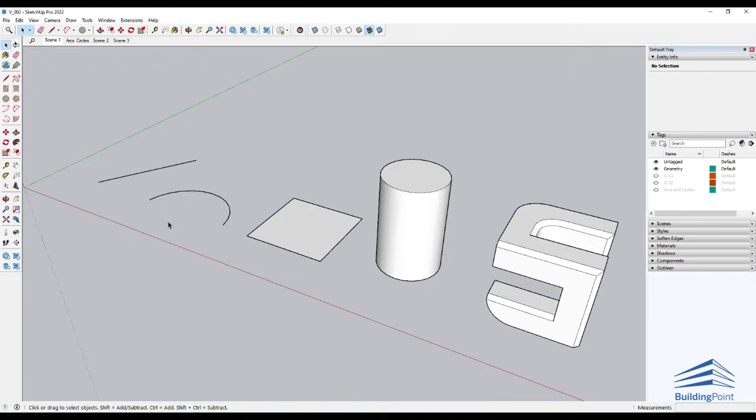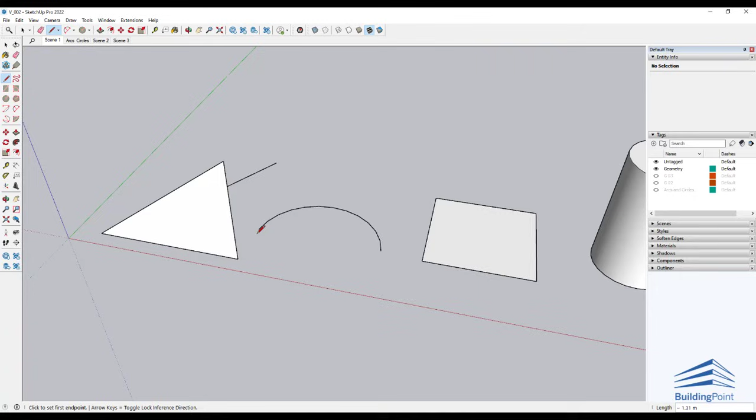As far as SketchUp is concerned, an edge is formed by connecting 2 points in 3D space. So if I want to connect this point to this point or this point in any other direction, I'm creating edges. And they're called edges because eventually, if I have a few edges, I'm going to generate a face. So the term edge is that connection between 2 points in 3D space that will generate a face. And I know some people use the term line, which is fine, but we are going to associate the term line with the command.

Now, let's have a look at the circle command and the arc command. These two commands allow you to draw curves in your models. And it's important to understand that even though they're curved, they're basically a series of interconnected edges, as you can see on the screen. You have the option to change the number of edges before and after you create one of those two elements.

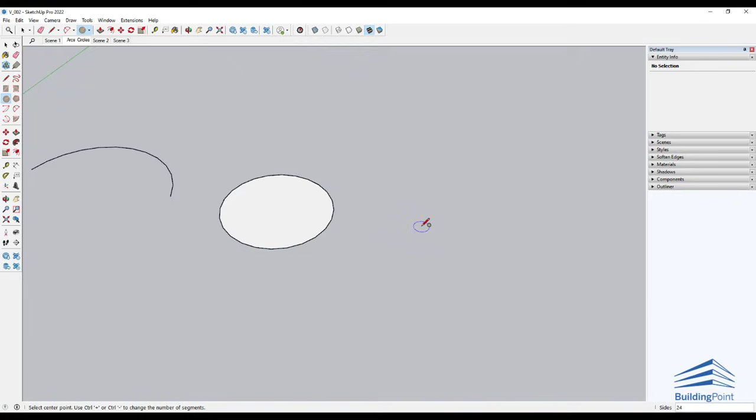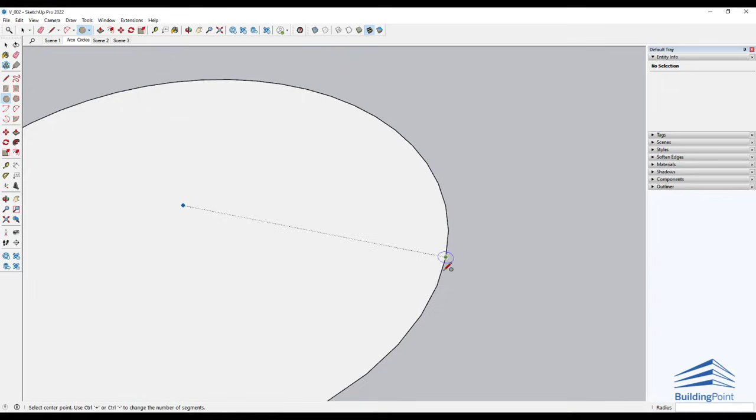For this example, let's just get a circle and notice that down in the measurement box, SketchUp has assigned 24 sides by default for every circle, but you can actually change that before you place the circle. So if you go to the measurement box and type 45, enter, the circle that you create there is going to be formed by 45 interconnected edges. And same with the arc.

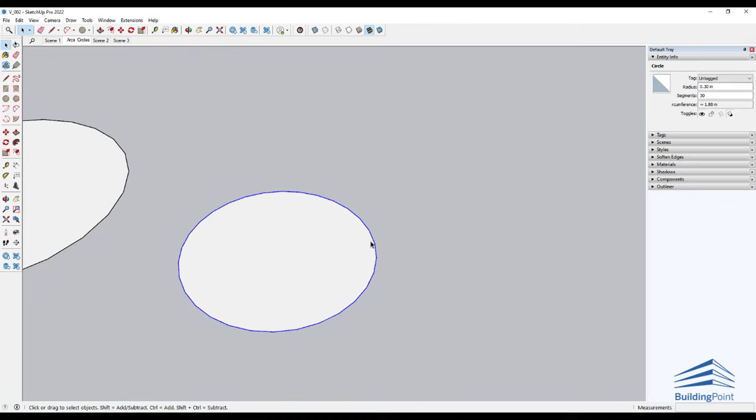Once it's been placed, you have the same option of selecting that circle and modifying the number of segments in the Entity Info window. So you can change the 45 to 30, for instance, enter, and now that circle has 30 straight interconnected edges. So it doesn't change the curve, it doesn't change the place of the element, but you can modify it before or after.

Another thing to know is that you can have a series of edges, like in this case, I've drawn 4 different edges, and by selecting all of them, whether they're straight edges or arcs, you can right click and weld them. What it does is it creates all these 4 edges as one single entity, and SketchUp recognizes that entity as a curve. In fact, in the Entity Info, you can see it's a curve, even though it doesn't look like it, and that curve has 4 segments.

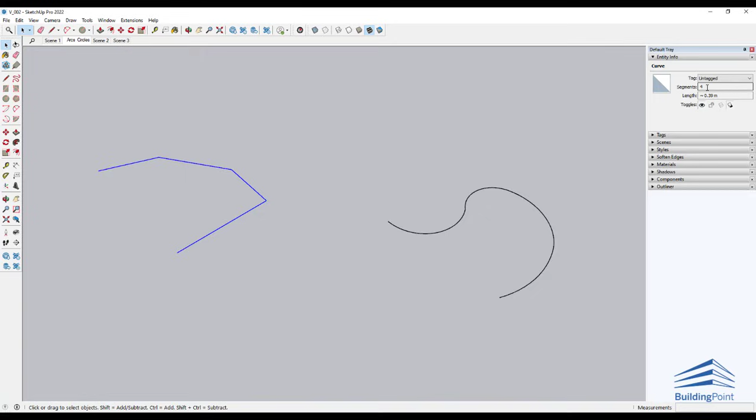Now, very different to arcs and circles, because if I go to the number of segments, I cannot change that number. The important thing to remember is that whether it's an arc, a circle or a curve, these elements are basically made of a series of edges. And those edges can be broken apart or put together again as needed.

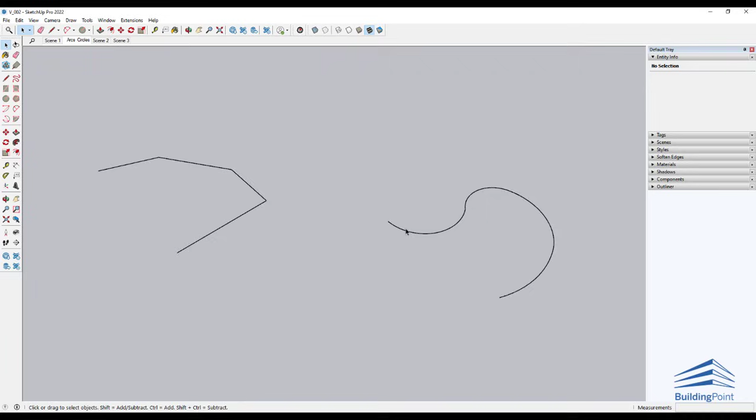Let's have a look now at faces. A face is created when 3 or more edges are connected in a single plane. So in this case, as you can see here, I have these 3 edges and they create this face.

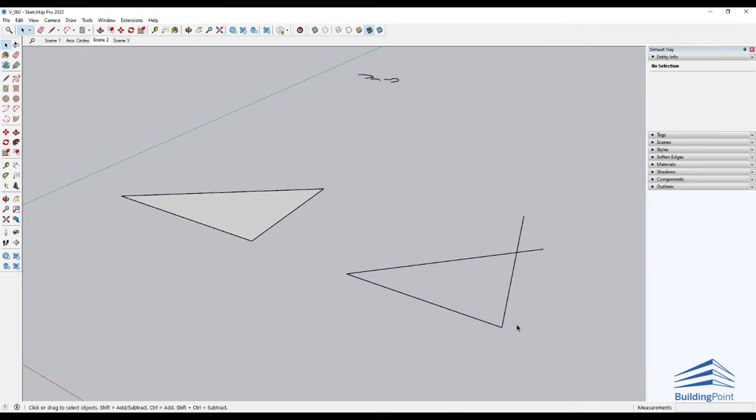Now, the important thing to remember is that they have to be in the same plane, because sometimes you can have these very same edges, but they don't create any face. And the reason for that is because if we orbit around, then we will notice that in fact there are 3 edges, but they're not in the same plane. All the edges have to be in the same plane in order to generate a face.

In the modeling process, we're also going to encounter the term surface rather than face. So face, like we explained before, is created by 3 or more edges that generate a face, like in this case, and you can see face in the entity info, and that's a face.

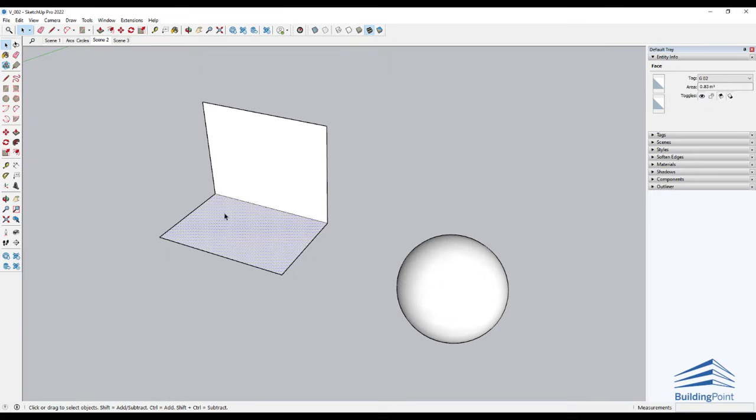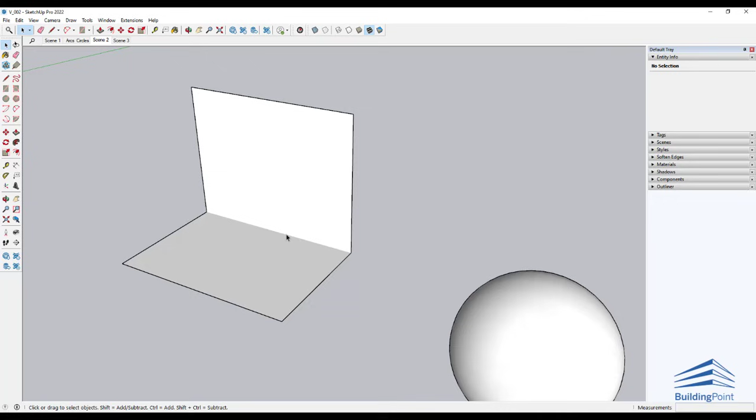When two faces are connected by the same edge, like in this case, I have this face and this face connected by this edge. But if I right click on that edge and soften that edge, once I select this, that becomes a surface. So that's one thing to remember, is that if two faces are connected by edges and that edge has been softened or is hidden, then that becomes a surface.

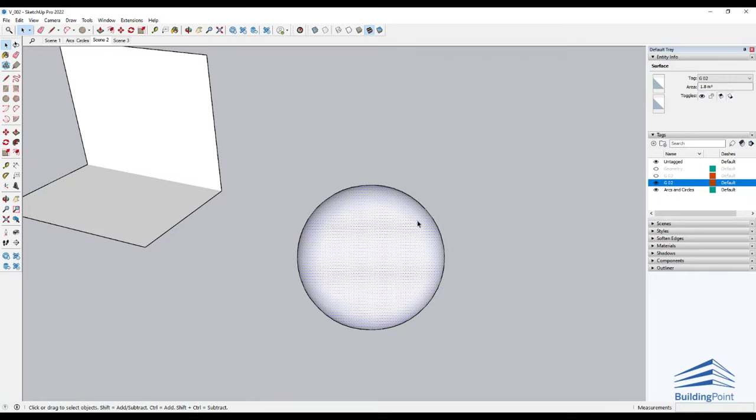Let's try to understand the previous concept a little bit more in detail. And we're going to do that in this example with the sphere. When you create a sphere, you select that sphere and you can see that it is a surface. It is a surface because it's a series of faces interconnected or sharing edges. If you toggle the hidden geometry on, you'll see that there's a lot of different individual faces, and you can see that in the entity info window.

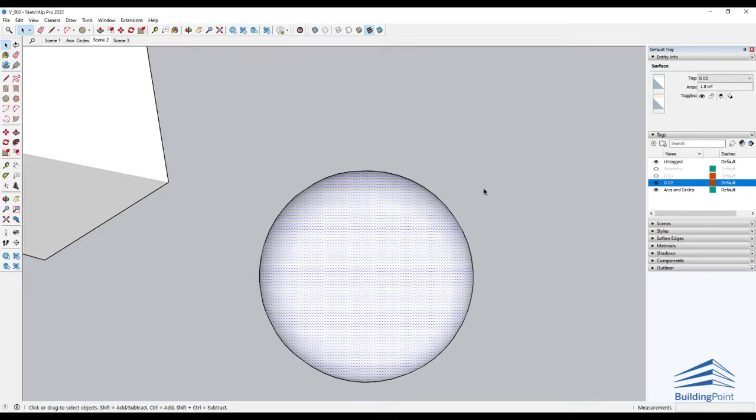These faces are sharing these edges, but these edges have been hidden. And that's why if you toggle the hidden edges or the hidden geometry on and off, things are going to change. And this is very important as well, because this is going to determine how some commands like push pull or follow me tool are going to interact with your geometry. If I toggle the hidden geometry on and select a face in this sphere, I can definitely push pull that face. But if I Control Z, toggle the hidden geometry off again and try to push pull, this is what I get.

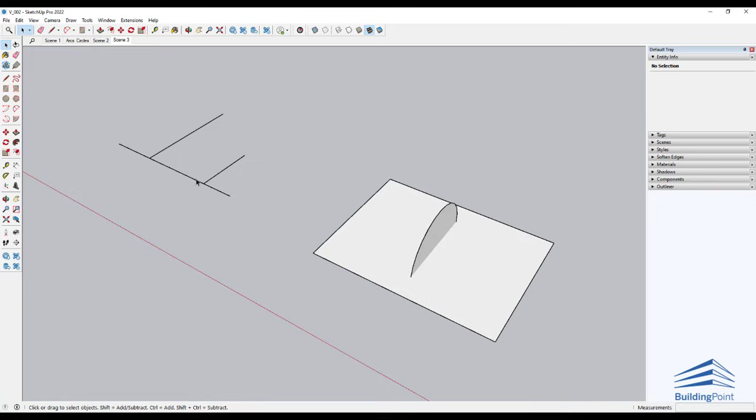One last thing to talk about before we go is that once you have an edge and you intersect that edge with another, you break that edge. So in this case, have a look at my screen. I have one edge in here. The moment that I get another edge in there, that will break that edge in two. So that's perfect for edges, but for faces, that's not the case.

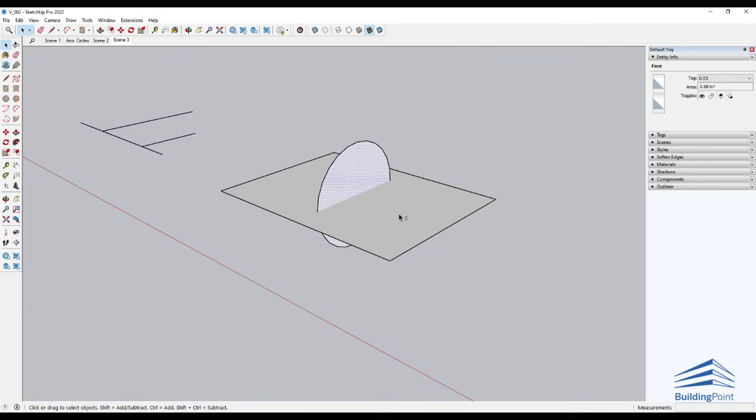So if I have this face in here and create another face like that, notice that they're intersecting, but they're still two different faces, unless you tell them not to be. And you can do so by selecting the two faces, right click, intersect faces with selection, and then you'll have one face, two faces, and obviously this is still one, but by intersecting with the selection it has created an extra edge and split that face into two.

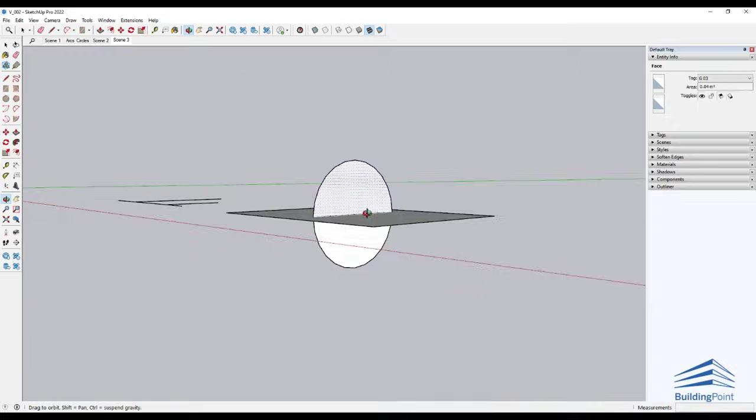So that concludes this video. And before we go, I just wanted to make sure that no matter what you do, no matter what your workflow is, it's just basically understanding how SketchUp works and understanding that every single model in SketchUp is made out of edges and faces, and understanding the interaction between these two elements is the way that you can get better at your workflow process.